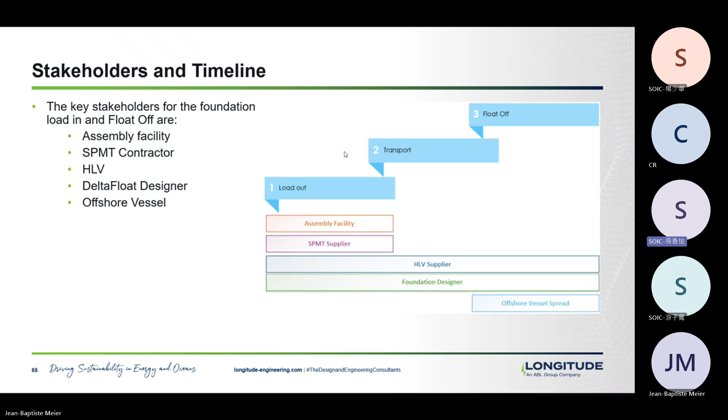Then for float off only, we will need an offshore vessel spread, can be AHTs - basically some vessels to perform station keeping of the foundation and help with the float off from the HLV.

And lastly, a marine warranty surveyor might be required depending on your stakeholders' requirements, but basically they would work across the different phases from loadout to float off.

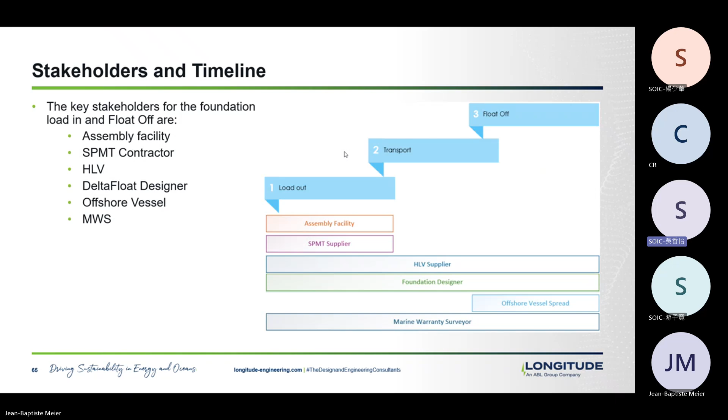Design brief and design basis, same - there is a good understanding, and we will have to basically ensure the loops between engineering and design with the operation procedure.

We are closer to what we had for the mooring, which is that today there is sufficient expertise from different operators to provide procedure feedback and feedback from operations. So the engineering can start with existing data or reference points for designing and getting the design suitable for operation, but this time will still be the critical time and the critical loops to be able to coordinate the work and progress in the planning.

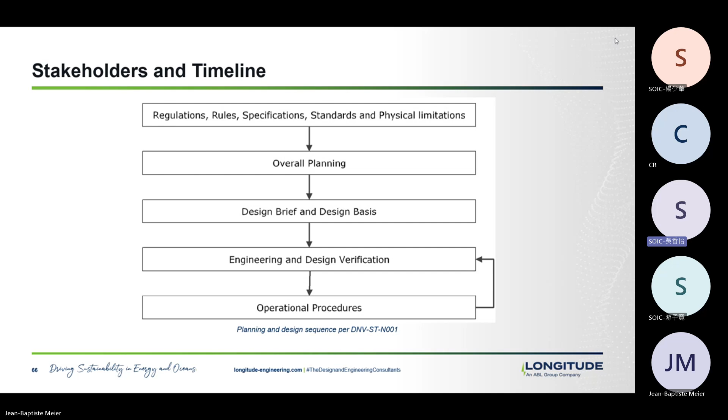In terms of global timeline, same as for floating to floating, we are talking about a range of durations that are in the year or years before.

These are operations that need proper planning, proper selection of assets, and for which the operation engineering is going to be critical. The operation engineering will depend on your foundation and on your engineering, so it has to be incorporated in the design of your asset as early as possible. We will see there are impacts when you perform loadouts and floatouts that can be directly within your primary steel, so as early as possible you will need to understand the interfaces you will face during loadouts and transport.

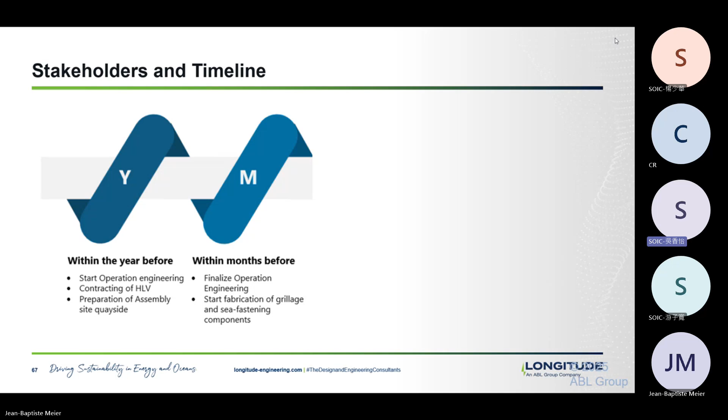In the months preceding the operation, same - you will need to have finalized your operation engineering. There are significant amounts of steel to be fabricated to enable the operations. You will need support, grillage, sea-fastening, guides, specific reinforcements on the HLV. All this will have to be engineered, and you will need a range of months to start fabrication. The biggest component in terms of weight is usually the grillage and sea-fastening components, which obviously depends on your foundation and HLV selection.

Within the weeks before, you need to have obtained approvals from stakeholders like the MWS. You will mobilize the HLV to the assembly site and start installing any temporary steel on it, usually starting with the grillage. It can be a significant amount of work that you will have to do at the site.

And then within the days before, you can start preparing your SPMTs for the operation, mobilize them, assemble them at the assembly site, and test the SPMT configuration. And then you're ready to start.

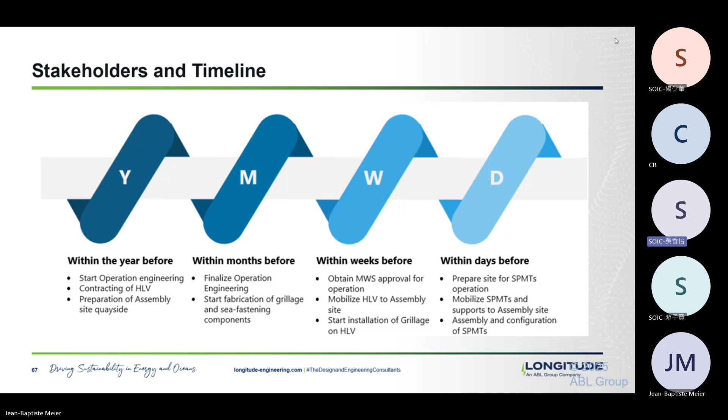When looking at asset selections, the first asset that needs to be looked at is your HLV, or your semi-submersible vessel or barge. The difference between vessel or barge is because the vessel will have its own propulsion, the barge will need to be towed with its own towing spread.

The few criteria that you will need to meet, one will be the loading capacity of the vessel. So you will see the vessels that are rated in terms of their ability to load cargo. In terms of cargo density, your foundation is actually quite low compared to, say, oil and gas modules, for example, that have fewer interface points and concentrate a lot more of the loads.

But still, one of the main limitations and one of the drivers that you will have for your selection of the asset, it's going to be the deck size and related deck strength.

The deck size, when you're performing transportation that's going to be very short, if it's just about bringing the foundation offshore to do a float off, because you basically use it as an alternative to lifting to launch your foundation, then you can take very narrow weather conditions, and you can afford to have your foundation being wider than the vessel, or having some temporary steel to support the broad footprint of your foundation. Because that's the main issue that we have with semi-sub foundations, it's just their size and their footprint.

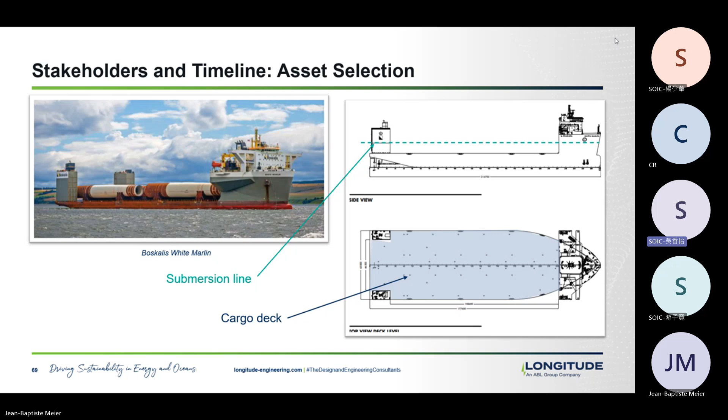The next thing we look at is the submersion line - the ability of the vessel to go underwater. On this one, the White Marlin line is indicated here. Basically, your vessel will offer you all this clearance to satisfy your foundation draft plus the grillage plus the clearance. These are the main two parameters that we look at.

When mentioning the availability of assets, here you have a very broad picture of HLVs. You can see that the capacity goes up, nearly multiplied by 5, if you take the biggest one, the Boka Vanguard, which is overkill for your foundation, let's be clear. Down to smaller vessels from the SAL family, for example, this is the total lifting capacity. Even with the smallest HLV assets in this table, the margin that you have with your foundation is quite broad.

You could even consider, in the event where you're doing an actual transportation with a voyage and not just a launching for a float-off, to have more than one single foundation on the vessel. It's only a matter of deck space available. As I said, the main constraint you will meet is how much breadth you can provide on your vessel.

Here, for example, a 60-meter breadth allows you to support the 3 columns up to the side shell, but you still have some of the foundation overhanging - roughly half of your column diameter is over the water. As we said, when it's just a float-off operation, it's not a problem because you're not sailing in unrestricted condition, going very far. It will become a problem if you try to go further and have a transportation or voyage case for the vessel, and this is the factor that's actually going to limit the most the selection of the vessel - the breadth of the transportation.

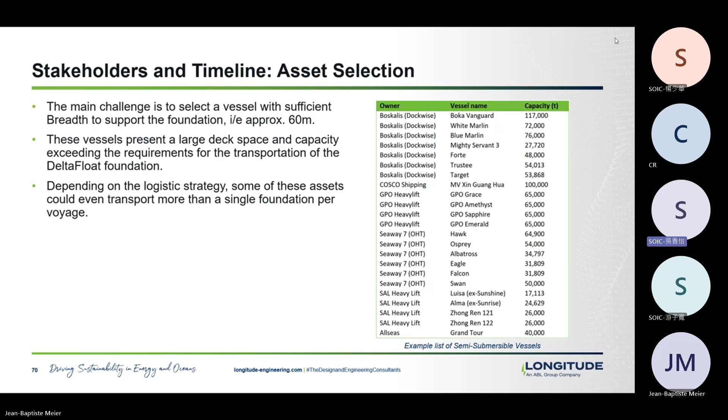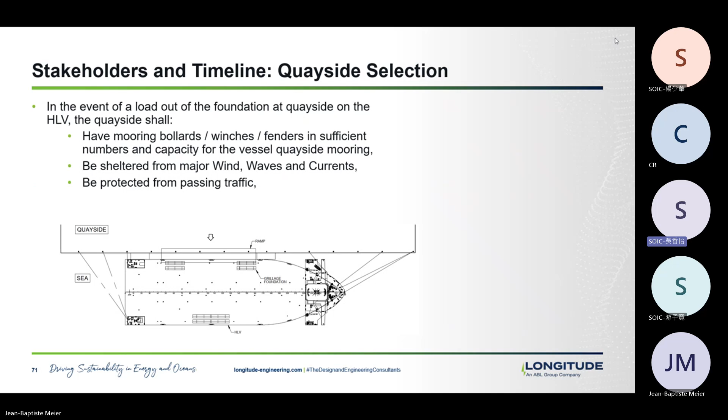On top of selecting the HLV, the selection of the quayside or marshalling location, call it as you want, will also have its set of constraints. The main one being the equipment already existing on the quayside - we're talking about the availability of fenders, for example, that can be permanent or temporary fenders on the quayside.

But also the bollard bits and their ratings, and the exposure of the quay is a factor that can be taken into consideration, especially when doing SPMT loadouts. Typically, if you have a lot of passing traffic alongside the quay, or if you are very exposed to wind, wave, or currents at this location, it will have an impact on your operability, and you will have to hold for longer periods of time.

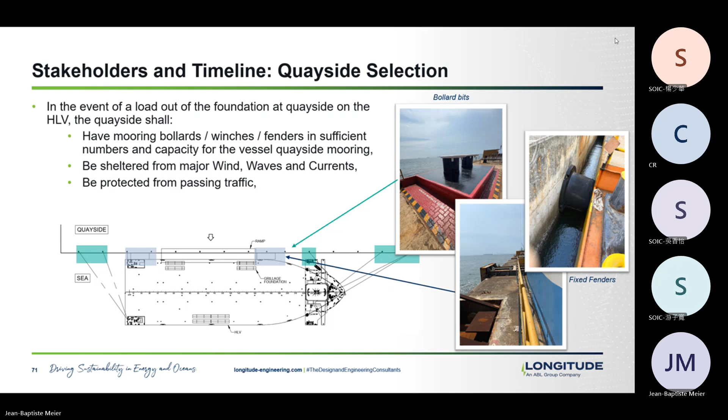Still in the quayside selection, one factor is that we need to make sure, because of the footprint of this foundation, that there is sufficient space and access to the quayside to do the actual loadouts. A lot of quaysides are able to give access to vessels when they are moored alongside, but they don't necessarily have clearance that allows the full structure to pass on SPMT. So sometimes it will require some changes in the way you have your wharf.

It means having nearly 80 to 90 meter clear quayside to perform the operation. Another factor is that while at your fabrication location, you have a grillage supporting the foundation during fabrication or assembly, you need to consider that your SPMTs, once they take the load, will transfer it to the quayside. For the whole route from the fabrication location to the vessel, you need to satisfy the minimum ground bearing capacity, knowing that if you load at near full capacity modern SPMTs, you are imposing 10 to 14 tons per square meter.

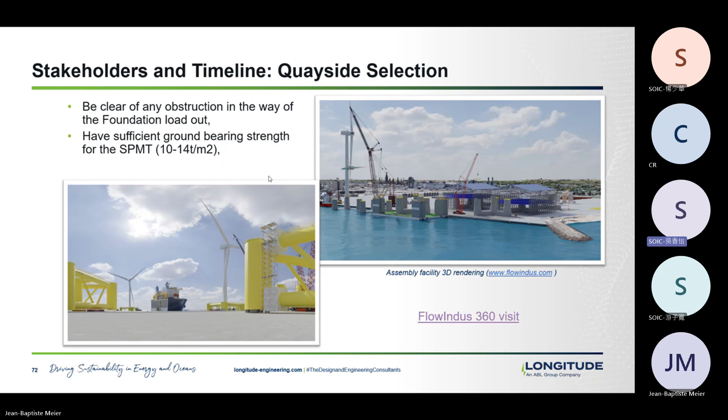So on top of that, that was for the last large asset selection, basically where you have to choose your execution marshalling location.

Now, in terms of operation preparation, we've seen there are many stakeholders. Here, one of the critical stakeholders is again going to be the designer of the foundation. It is looking back on the topics we had very early on in the introduction on your floater - it's about the weight and the control of the weight. Here, the control of the weight for the foundation is going to be critical for the SPMT operation, and also for the stability of the HLV. So you need to know your weight, and you need to know your center of gravity.

When you look at commercial models, you're not going to do weighings and inclining experiments for every foundation. But in a demo case, typically you would expect to have a weighing done - that's an arrangement of a weighing cell, for example, below a module. You would expect a weighing and an inclining experiment to be done on the foundation, except that in your case you won't be able to conduct this inclining experiment, because you will be loading out directly. So you will do indirect measurements with the weighing.

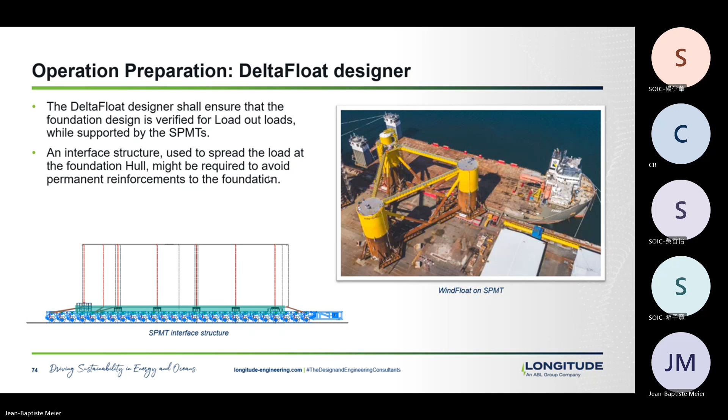Then what we need to check on the design side is going to be the motions and reaction force of your foundation when you're doing the transportation. So the transportation, even if it is a short one, you will be subject to the vessel motions, and you will have a new supporting condition. Your foundation started to be built in a static case.

Supported by the assembly facility supports, then you have an interface structure with the SPMTs, and the SPMTs will pick up the load where the construction supports are not, because you cannot insert your SPMTs if there is a clash. And then you also need to make sure that the interface with the barge, between the barge and the foundation - which we will see after, is the grillage - also will require your foundation to be verified.

So it is in 3 different steps. You will have 3 different locations where your foundation can have a local strength impact, so you need to check all these cases. In this case, they have different ranges of loads, and they also have different configurations in terms of distribution under your vessel.

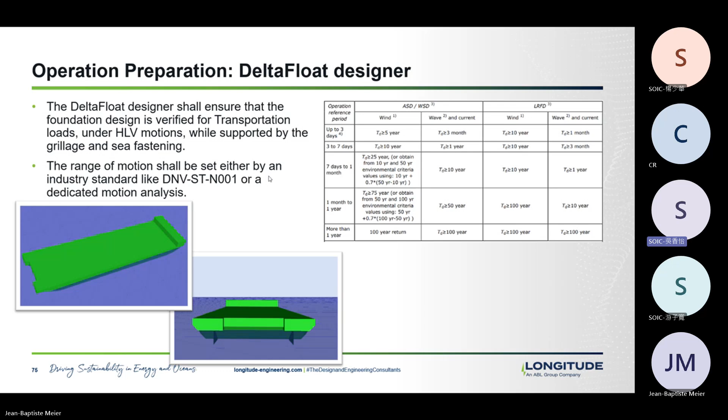You need to basically make the connection between your cargo that's going to be on top and bring your loads down to the main structure of the vessel. So you will target the bulkheads, the main frames, the column locations in your vessel structure.

The idea, as I said before, is that you prefer to add a grillage interface that is welded to the deck rather than reinforcing your vessel under deck or reinforcing your foundation. So you try to distribute and have a proper load path from your foundation down to the vessel structure.

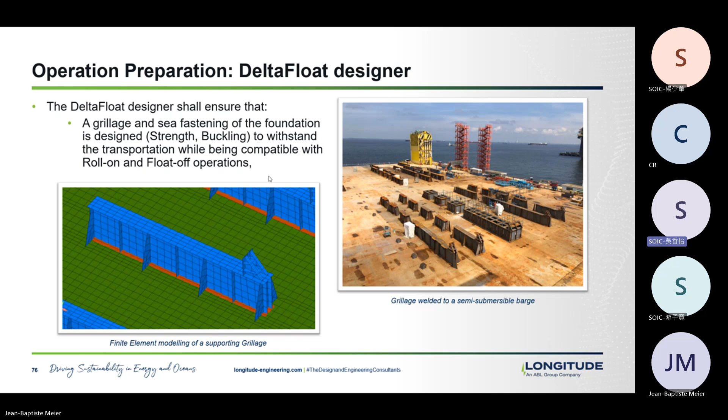In this case, for example, where we needed large brackets that were encroaching on the space, basically the brackets were installed after the SPMTs traveled through.

The next thing to check on and prepare for on the design side is the point we made already on ballast on the previous one. So all your conditions of ballast, draft, stability considerations, they have to be done for every step of the float-off operation. That means having a good understanding of how you are going to launch your foundation.

Are you going to launch your foundation with some ballast already in the foundation, maybe partial? But then it means that the loads you will subject either the SPMTs or at least the grillage to are going to be greater, because you're carrying ballast water in your foundation and transferring this load into the vessel. So then the load is not just your weight, it's not just the 4,000 ton you were talking about, it's the 4,000 ton plus whatever ballast you're putting inside.

The other option is you're transporting the foundation without any ballast. But then you have an excess of buoyancy - I haven't seen your calculations on this, but basically the free floating condition of your foundation without any ballast gives you a very, very shallow draft, because you have all your pontoon volumes plus the column volumes that bring buoyancy, and you're only supporting 4,000 ton when you have a displacement target that can go up to 20,000 ton plus. So it's going to be a very shallow draft, and that means the behavior of your floater is going to be quite different.

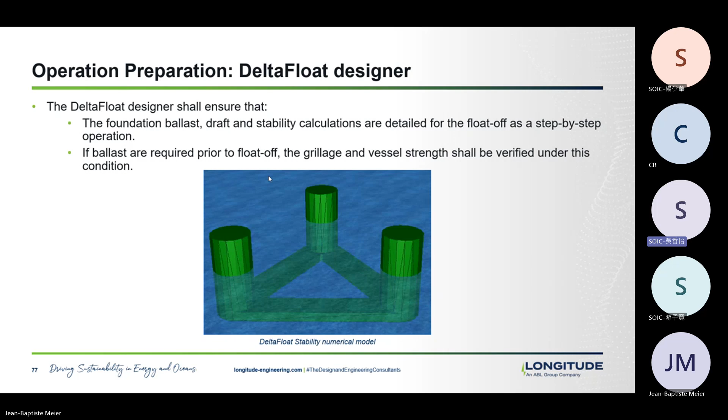We still continue—there's a lot of preparation for the foundation designer. Next point: we cannot neglect the fact that you will have a lot of towing activity, station keeping, and maybe some mooring activities if you have some temporary stage where you're moored.

All this basically will need outfittings on your structure—secondary steel, like for example pushing bars. Here, like the top part, there are bars to push the structure. All this secondary steel needs to be taken into consideration in your design, not only because it will impact your weight, but also because it's going to drive the operability and how you're going to control the position, what kind of asset you can use, what kind of towing rigging or station keeping rigging you can use. So all this needs to be set and discussed with the offshore contractor.

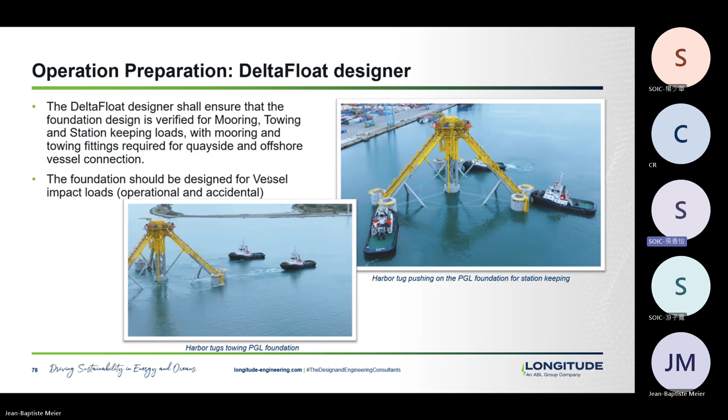And then you always have the possibility in some cases of direct push on the structure from the tugs. In this event, it means that you need to have a push area that has been calculated and designed for the foundation. But even if you don't intend for intentional push and having a push area, you will still need to subject your foundation to impact loads and verification of vessel impact loads, especially around the boat landings. So you will have requirements for either operational push or accidental push and impact study to do. Again, that will impact your primary steel and the design of the foundation.

Last smaller points on preparation for the operation with the designer of the foundation: accessibility. We need not to forget that whatever your ballast condition is—which is not your operation ballast condition, because your operation ballast condition will be one where you have the turbine and your ballast at the level where you target it, so your draft will be your operational draft—but when doing installation and float off, you still need to provide access for people, while the draft might be different by a few meters from your design condition, from your operating condition.

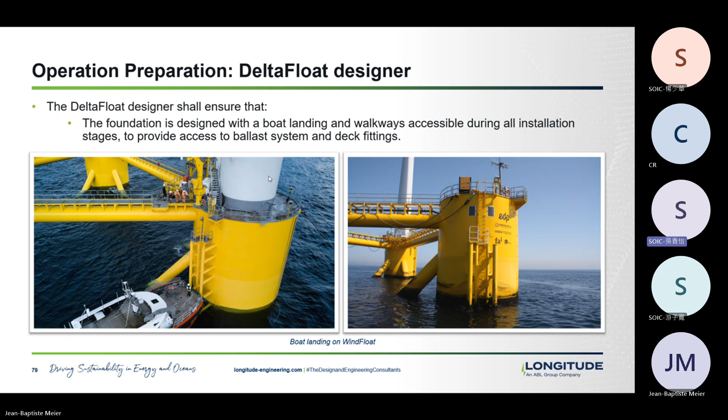Next, on the preparation of the assembly facility: usually the assembly facility will be the ones taking the coordination for the SPMT transportation down to the loadouts. Usually the transfer of responsibility between the assembly facility and the HLV contractor will be at the completion of the grillage and sea fastening of the cargo on the deck. That's usually where you will transfer the responsibility, and after, the yard is only there for support, for the quayside mooring, this kind of thing.

But similarly to the earlier points, when you're responsible for the operation and for the loadout, the assembly facilities will need to define the teams, the coordination, the responsibilities between the teams, and the methodologies used for the loadouts. They will need to bridge the procedures—here they have more parties to bridge, having to bridge the SPMT contractor, the vessel operator, but also the foundation designer, to make sure they are all aligned and produce a comprehensive loadout procedure.

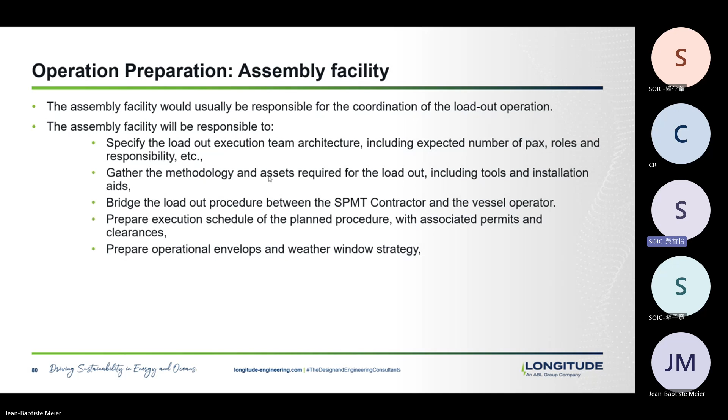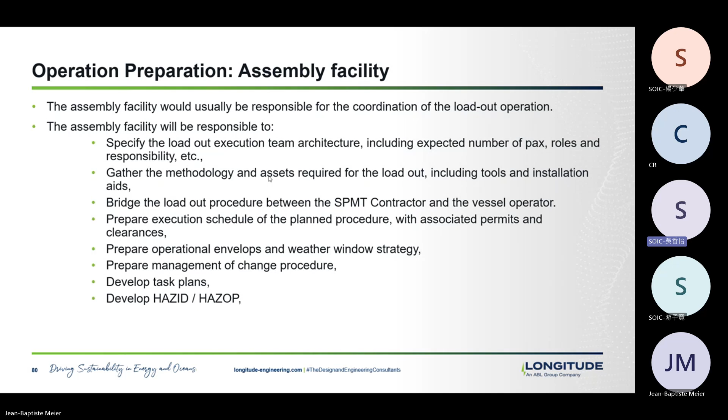They will need to align the schedules and either issue or obtain the relevant permits and clearances to operate. And last, more generic plans on the management of change, the task plans, and the HAZID / HAZOPs—so that they will cover basically down to the securing of the foundation on the floater.

In addition, it's the point I was making before - they will need to make sure that the way they have assembled the foundation is compatible with the loadout methodology. That means that the way they do assembly, which can be months if not a year before the loadout operation, needs to support an SPMT loadout before you even know your loadout plan. So it's about early engagement with, for example, SPMT contractors, where they can give you the target SPMT module size and how they would ideally arrange it to transport the foundation.

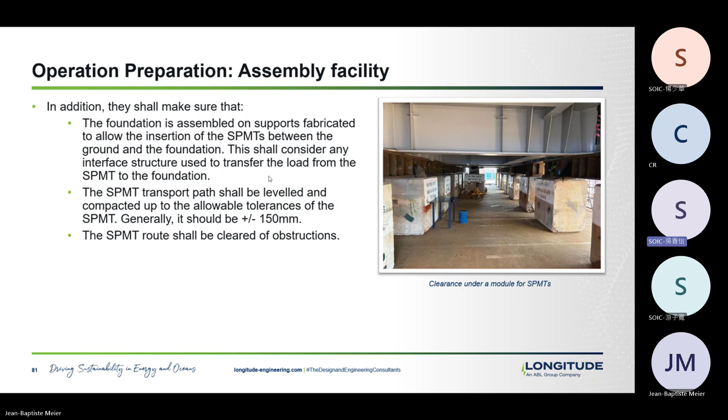The assembly facility shall also make sure that the ground level is fairly consistent across the routes. SPMTs can take some elevation variations and adapt to it, but they give as a target to have a route that stays within plus or minus 150 millimeter elevation difference. And the route needs to be cleared from obstructions and other projects.

Another point the assembly facility needs to check - we talked earlier about verification of the general ground bearing capacity. One area that can be neglected and can be critical for a loadout is the actual wharf capacity, basically your quayside capacity, especially because you will hold a concentrated linear load that comes from the ramp connection to the quayside.

That means you will concentrate - if you're in this configuration, you will have already some load on the barge, but out of all the axles, 40 tons per axle that are on the ramp, half of it is being supported on this single location on the ramp. That means the distance for the ramp from the tip of the quayside and the capacity at this location needs to be very well understood.

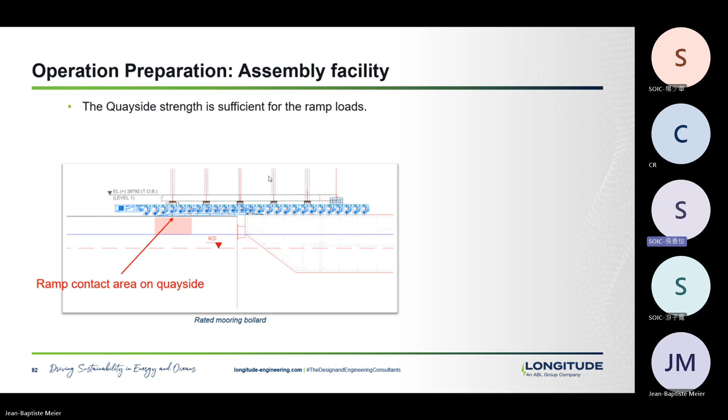Facilities used to doing skiddings and SPMT loadouts will know and will have a wharf, usually one special location designed to accommodate this, because they need additional anchorings of the retaining walls to maintain and hold this capacity. Marshalling facilities not originally designed for loadouts might face issues here, so they can make do with extra spreader bars or getting the load to go further. Mammoet, for example, provides matting supports and structures used to offset the load and create a bearing load on a much broader area - but that comes at a cost and a complication.

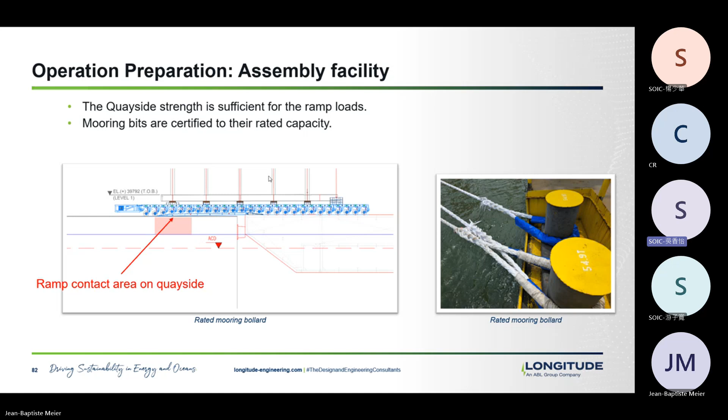Then for the assembly facility, we talked about the mooring bits. The one thing that is necessary is that these mooring bits need to be rated and load tested. So all this needs to be prepared, and obviously the rating of this bollard needs to be in line with the mooring analysis you will do after.

Then some more generic points - they need to provide proper access, so a gangway for example to go to the semi-sub barge. They need to provide all the services to conduct the work, and they need to provide protections and all the clearances for the operation.

Then looking at the SPMT - it's a modularized transporter, basically based on a unit of 4, 6, or 8 axles, I'll show you on the slide after. You can combine these units as groups or trains to carry as much load as you need, and these units are connected hydraulically, which helps spread the load down to the ground. So you take the load from your cargo and have an equal distribution of pressure from your wheels to the ground.

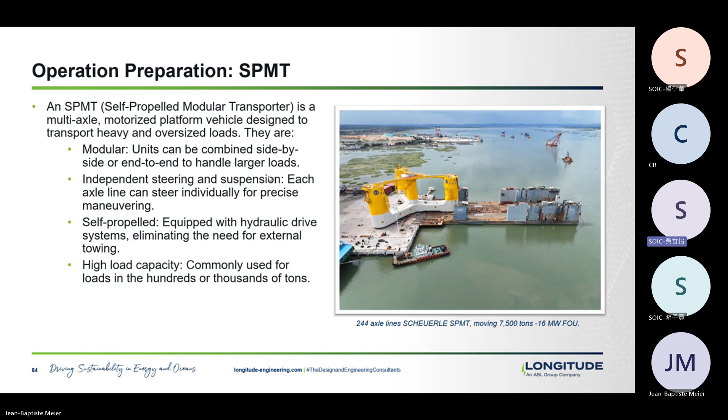These SPMTs can maneuver very well, they can turn on themselves - I'm sure you've seen some pictures. They allow for a very accurate operation and good maneuvering, for example to go and position the cargo on top of the grillage with good accuracy. And obviously it is scalable, so that gives you quite good range in terms of loading and total lifting capacity. The lifting capacities for each train, each step - so if you have a 4-line, 5 or 6 line, it will vary.

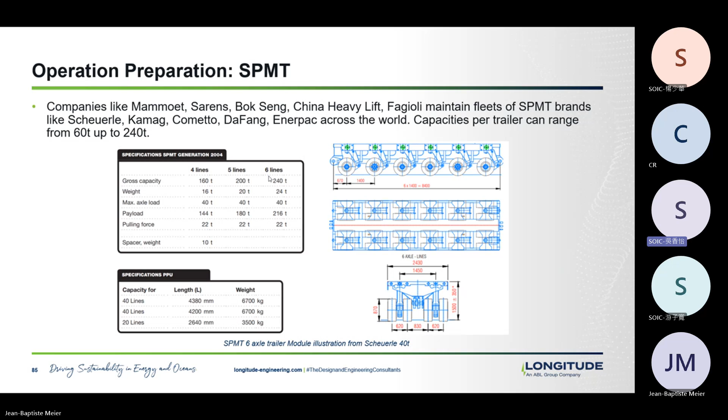There are a lot of brands and a lot of people operating these SPMTs. The famous brands are like Mammoet, Sarens, Bok Seng, China Heavy Lift, Fagioli. They all have a range of SPMTs, but don't necessarily have their own brands of it, the famous ones like the Kamag and Scheuerle ones. The fleet of these SPMTs is quite broad, and they can be brought from either civil work locations where they would use the same thing, or from oil and gas locations, so it is a resource that's easy to supply.

So in the case of the floater, for example, if we were to use an axle distribution and having a 3-point triangular stability support, we would use 48 axles in this case. So you have double trains basically mounted side by side. How you're going to get the sizing and selection of the number of SPMTs depends on the footprint and how much you want to distribute the load from the foundation. But it's also based on the input in terms of your total cargo weight and contingencies with the interface structure weight, so anything you need to add to your foundation or your SPMTs to take the load, the sea fastening. It's not the same scale of sea fastening as what you have at sea, but ultimately, when doing your SPMT transportation, the SPMT and the cargo are lashed together.

So they use turnbuckles, they use lashings, they will weld some pallets, but basically they need to be able to take the loads, especially coming from acceleration and braking. It's usually more braking than acceleration that can happen during the transportation.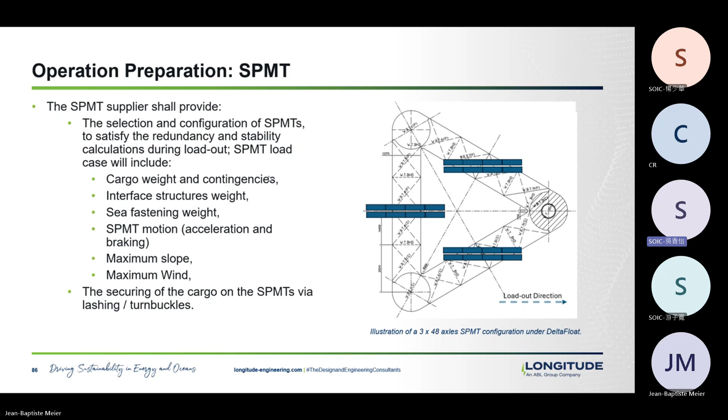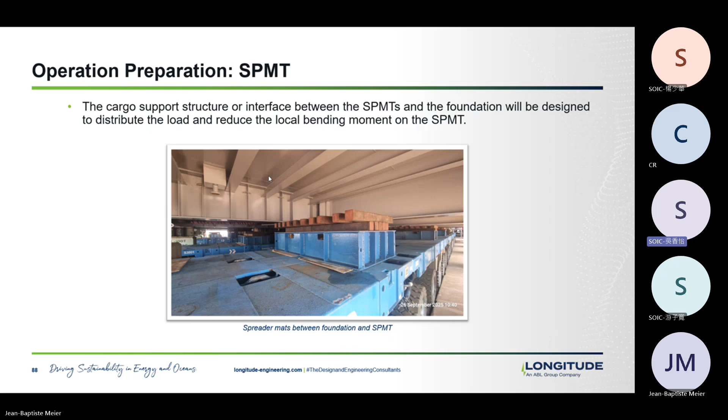The next point on the SPMT side for preparation is the ramp. We're not talking about the ground part, but the ramp itself. The ramps are usually welded on the barge side, so you'll have a slope that's welded and a hinge connection so the ramp can move together with the heave of the vessel and the tide.

The ramp is only deployed when doing the actual loadout operation, because when you're waiting and preparing, you don't want the ramp in position. You want to be able to go for low tide without having the ramp in the way. So it's usually parked to allow the vessel to go up and down, and only when the operation is in a readiness state do you install the ramp and start the ballasting control of the HLV, which we'll see after.

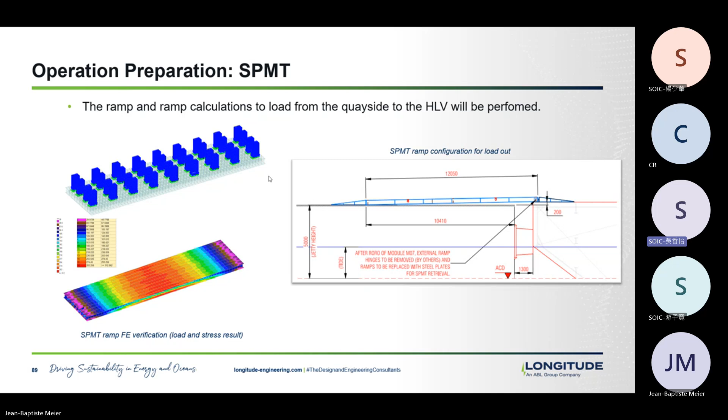So these ramps exist in catalogs - you can rent them, and basically the SPMT providers will usually come with their own ramps along with the SPMT.

The last point of preparation for the SPMT is gaining understanding of how the cargo is going to be moved from its fabrication or assembly location down to the position where it will be inserted onto the transportation vessel.

Here it's fairly straightforward - basically just a move forward to get away from the construction supports, then a kind of crab translation, diagonal translation, to face the ramp and go on board.

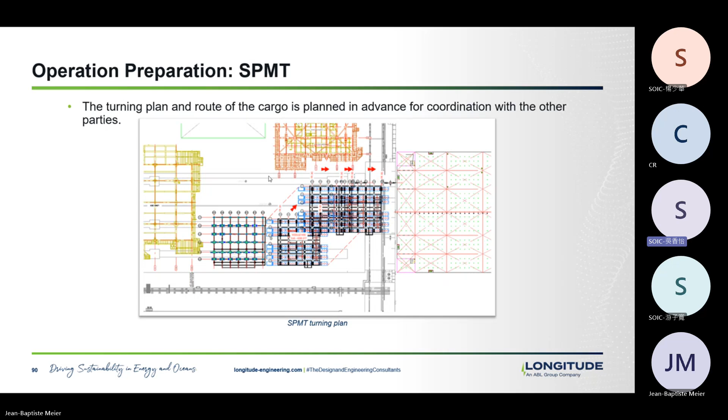But you also need to consider the environment around - there was another construction project just beside. So you have limitations, and knowledge of the site is important to plan the operation and get the turning plan right.

That's for the SPMT.

So, HLV. As we said earlier, the transfer of responsibility would usually be done at the completion of the loadout of the foundation onto the grillage once the sea fastening is complete. The shipyard will perform the sea fastening activity once the NDTs are finished on the sea fastening, then the handover is done to the HLV.

The main responsibility - I'll go quickly through this, but it's always the same thing - once you get responsibility for the operation, you're responsible for setting up the team, clarifying roles and responsibilities, making sure the methodologies and assets are in line with the intended operation, and that there's a good understanding of the schedule that is being shared.

Managing your operational envelope and the weather window strategy, and the general plans for HAZID, HAZOP, task plans, and management of change. Again, all this, even if it sounds repetitive, will have to be produced.

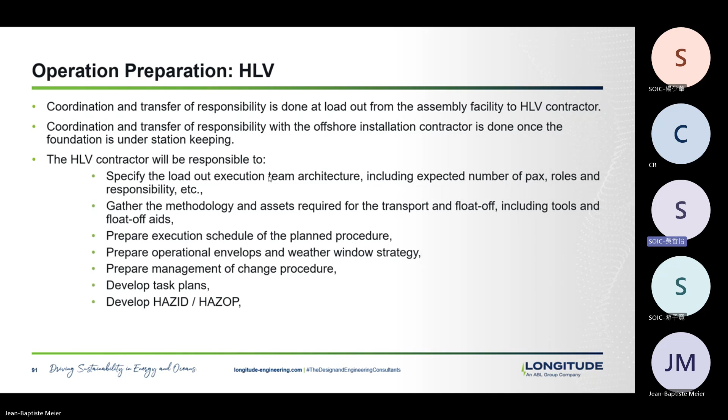Basically there should be no gray area in terms of responsibility. And that's where it's complicated, because when you lack the experience, you try to rely more on subcontractors and on people who have done it. But that's why you get some gray areas that are not being flagged out.

So the first activity and the first check for the HLV is on the mooring side. As we said, it's back to the table of operation reference period. How long you intend to stay restricted to the quayside is what's going to drive the selection of your environment return period. As we said, you can base it on the DNV-ST-N001.

Yeah, you can do site-specific calculations, but ultimately, even if you do seasonal or monthly calculations to cover your operation window, the return period, even if it's on a monthly basis, will still need to be 10 years or 1 year in this event.

In all likelihood, your period of time restricted at the quayside will be either 3 to 7 days or up to 3 days. For a pretty straightforward operation, you consider your mooring restricted as soon as you start your loadout operation. Before that, you can have a safe mooring - you don't have cargo on top of your HLV, which means the mooring loads the HLV sees are much lower.

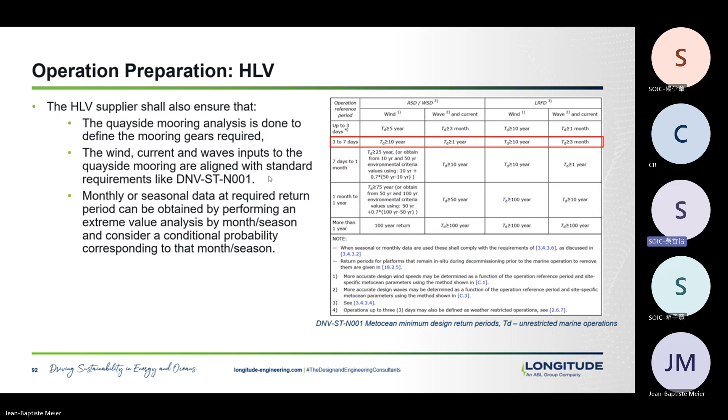So mooring analysis - for example, this is a mooring analysis run for the loadout I was showing on the previous slides of the module, on a stern loading on a semi-submersible barge. That's the one I was showing you this morning, the weather forecast.

Basically, this direction is highly subjected to squalls and high wind values. It's very exposed - it's on the west end of Singapore. And we had no choice because of the quayside and the fact there was another project here, we had no choice but to do a loading by the stern of the module.

But this configuration is very demanding for your mooring lines, for your bollards on the quayside, and for your connections on the barge side. So you need to consider your intact condition with all the wind, wave, and current effects that apply on the vessel and the cargo.

That will be subject, obviously, to the variations of draft that you can have. And one of the biggest contributors to the variation of your mooring lines, at least the pretension in it, is going to be the tide effect. The variation of tides, when you're not doing the actual loadout, when you're just moored to the quayside, the tide is going to cause your tension to vary on the mooring line.

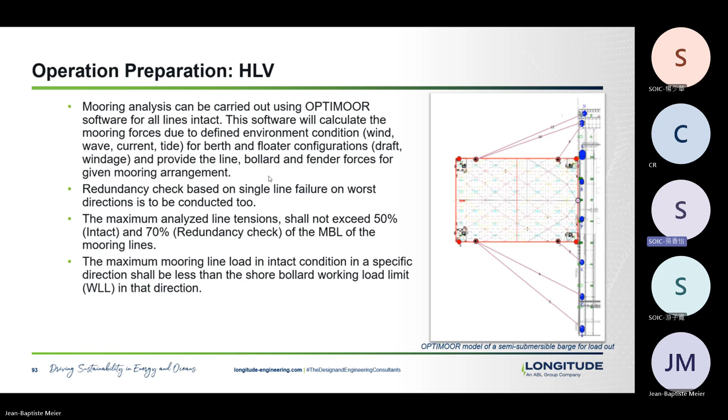Then after mooring, obviously one of the main topics on the HLV is going to be stability. And there again, the stability is not just a one-off load case like what you have for transport. So transport is one configuration. The loadout is going to be, and you will see after, a step-by-step loadout approach. So your stability, your longitudinal strength will have to be checked for all these steps.

Same goes for the float-off operation. As we said, the float-off operation will see different ballast configuration on the HLV, but maybe also different ballast conditions on the foundation itself. So it is a large number of stability configurations, and 10 configurations is actually going to be run to check a loadout, transport, and float-off operation.

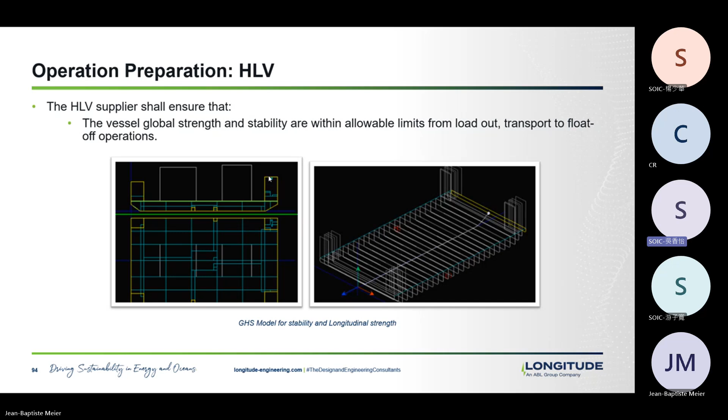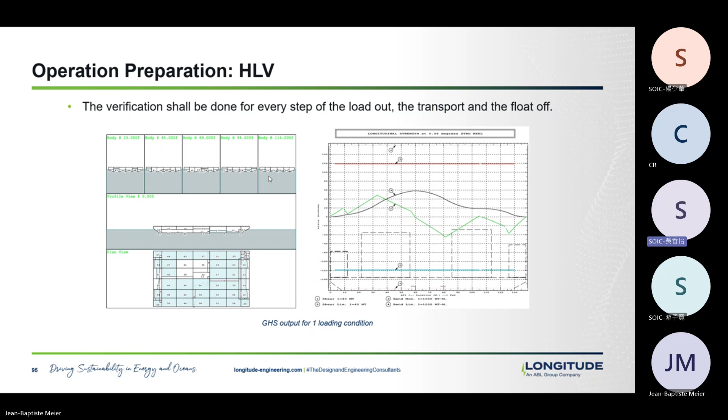So yeah, that's what I mentioned here. That's just an example, for example, of one, using GHS as the stability software. So it's one tank configuration, which is an awkward one because these tanks were being repaired. But that was one step to meet the loadout condition for the modules. And I try to keep the same examples through the presentation, so it's still the semi-sub vessel and the module I was showing you before. So obviously what you are targeting at is to get below your permissible shear and permissible bending moment.

And meet your stability criteria, obviously. But it's not only your global stability and the global longitudinal strength that you need to look at. As we started to mention about the grillage and the impact it can have on the foundation, obviously the grillage has an impact on the vessel. We want to make sure this grillage doesn't impact the reinforcement below your vessel, but you can wish for it, you will need to verify it also.

That means you don't always have to necessarily model the full vessel structure. You can focus on some local area. But basically, you will need to get an understanding on how your underdeck is working and how you're utilizing your vessel, having in mind that for your grillage you're free to put the thickness and material grade you want. Your foundation usually will have high strength steel, with a range of thicknesses on the higher side.

These barges, I mean, they are vessels, they are thin plated, and they can be very sensitive to loading from the grillage. It's not only the loading of the sea fastening and the grillage, which transfers your load from the foundation to the glue structures into the vessel. It's also the SPMT axle load.

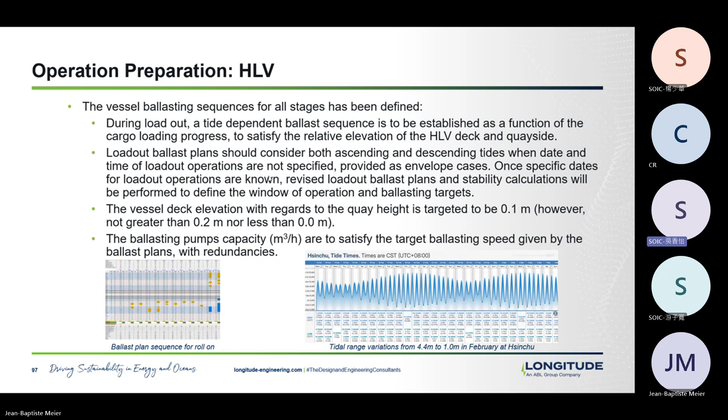All these calculations drive you to this kind of table. It's blurry, but I'll explain how it works. That's basically your step-by-step ballast plan. Horizontally in all the columns, it's step-by-step times, every 10 or 15 minutes. Because we know the dates of operation, the expected tides, the elevation of the quayside with respect to the water and all that, that's our top data.

So that's the setup of our operation: what are our different elevations, what is the time of operation. And all these are discrete steps, covering the hour and a half or the 2 hours required for the operation.

Then all these lines here, all these rows, they are all the ballast tanks available in the vessel. Some of them, like grade 1 for example, were out of service, so we couldn't use them. Some are tanks that are not being affected, like day tanks and things that are not ballast tanks. But then what you do is for every step, assess how much volume you need to transfer from what tank to what tank, or outside of the barge, or onboard. So how much variation per tank do you need to do?

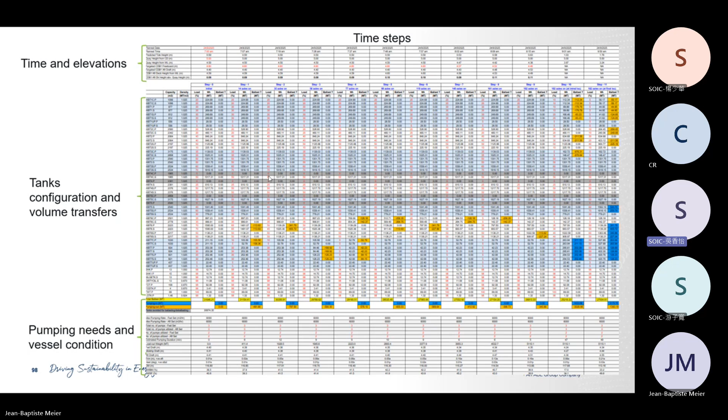So that was for the load-out. For transportation, it's actually very straightforward. It's a single case, and it's usually a case where we try to select our ballast configuration to minimize motions. In your event, you will see how much load is being transferred from the cargo to the vessel under motion. You have a short transfer, you expect to have a short transportation and weather-controlled transportation. So you might need a very limited adjustment at departure, but basically the idea is, okay, I want my transport condition once I leave the quay.

For the float off, I'm not going to present it again, but basically you need to do the same work in terms of ballast sequence. But this time your limiting criteria and your variation is not your quayside elevation, is not how much clearance you have with your ramp, it's how much clearance you are creating with your foundation, knowing that your foundation is also sinking, gaining draft up to a certain point, and as we said, will be impacted also if you're ballasting the foundation at the same time. So that's why understanding the launching condition of your foundation is going to be important to understand if you want to launch it with partial ballast or anything. But the principle remains exactly the same.

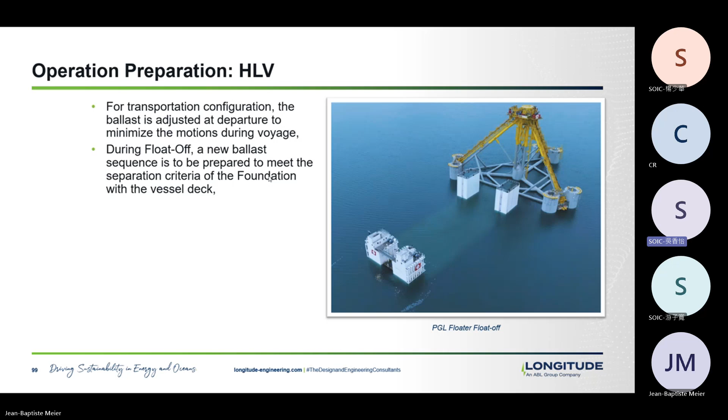During the float off, the operation basically - your target is to gain separation of your floater so that it's free floating, under control by the tugs, and sometimes you can also have some tieback lines that connect to the HLV vessel. But the idea is to understand what draft do I need to reach with my HLV to get the floater into the free floating condition, and where can I do this float off location to have sufficient clearance or sufficient water depth to do the operation.

You have two philosophies. Some HLVs are compatible with bottom approach, which is basically they can accept to have the aft bottom of the barge touch the seabed. In terms of position control, they favor this approach when they need to stay in position for longer durations. But the majority of HLVs, when running faster operations with benign environments, will remain in an even keel configuration, just maintaining even clearance between your bridge supports and the foundation.

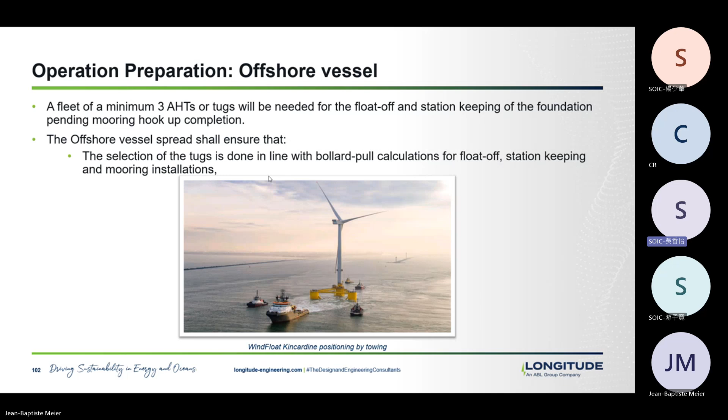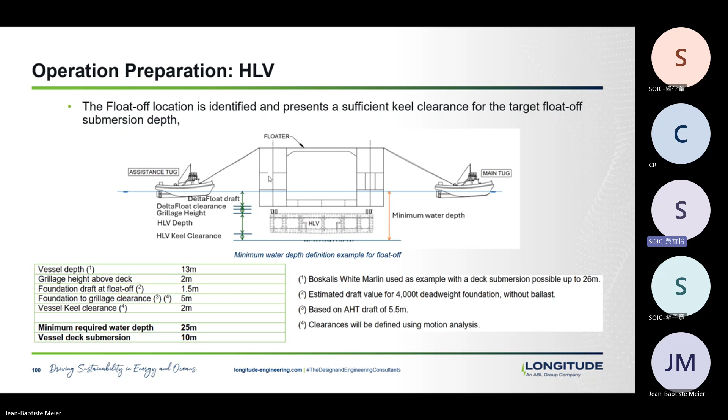Can I go back to the slides? Yeah, so here I think it's something similar to what we did just a few years ago on float over. The other is essentially opposite. The guiding post that JB was mentioning is somewhat similar to the LMUs and DSUs, where there's initial separations, there could be movement of the floater, whether you need a guiding post or a polymer to soften those loads, something you need to design and analyze in steps.

No problem. And the last one, the MWS, again same - it will depend on your stakeholders' requirements, but these activities are even more relevant in terms of marine warranty survey, especially loadouts and float off. Basically, the range of services would bring you the inspection, the document review, the coordination of operation on site, and the witnessing of all this.

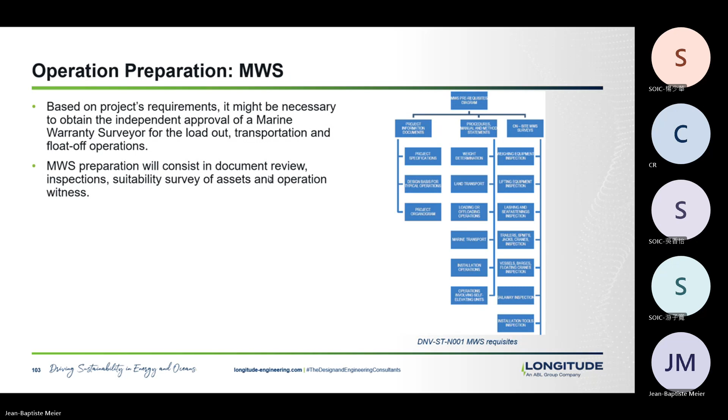Now going to the actual execution of the operation. As we said, we have the HLV that will come in position and be moored. In this event, we put it alongside with the quay.

The SPMTs can be locked hydraulically, and you can even choose to stroke and jack down your SPMTs to the minimum in case you need to wait. As long as your foundation can take the load from the interface structure under wind conditions, you can just wait for your loadout window to open with the foundation and SPMTs ready in front of the ramp. Once you have the operational range of the SPMT - for land transport, the SPMTs per their data sheets, depending on the cargo, can operate up to around 15 meters per second wind, and that's the one with the most impact on the foundation.

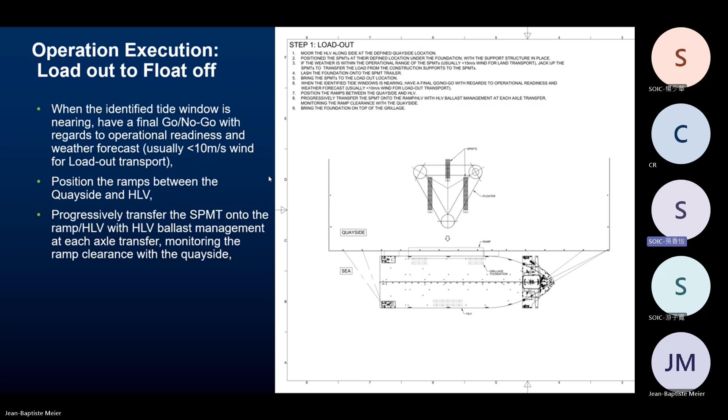Once you're ready, you will lower down the ramps, put them in position, and start your ballast management. You will start with your initial condition, then progressively and actively manage your ballast to cope with the transfer of the load and the tide variation during the operation.

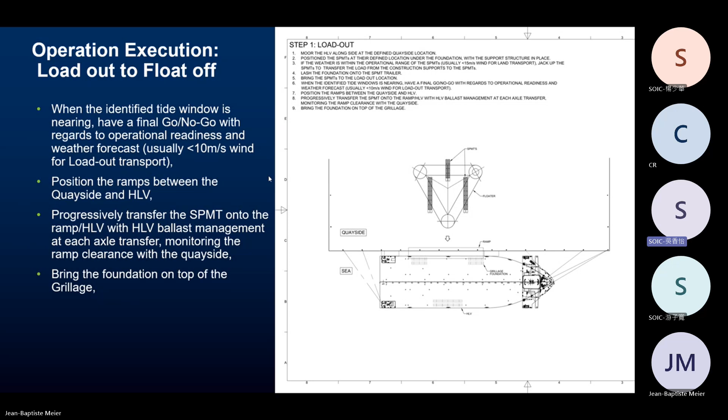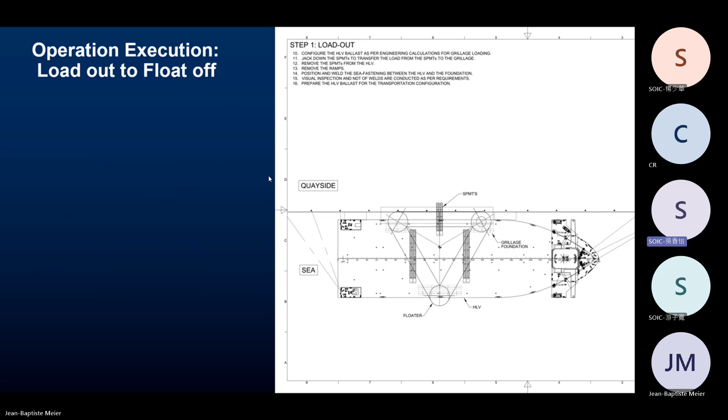Once you are with the SPMTs on the vessel, there is one extra step of ballasting you will take, which is to adjust the ballast to your grillage loading condition. The idea is that you want the ballast configuration, the shape of the vessel, to be in line with what you have prepared for the distribution of loads of your grillage.

What I mean here is that if during your loadout configuration you have done a lot of ballast, let's say deballasting at the center part of your vessel because you brought your cargo in, you are creating a situation where you have a vessel deformation that impacts the transfer of loads from the foundation to the grillage to the vessel.

Then you will need to compensate for that, meaning transferring some ballast to make the grillage distribute the load so that, at least in the static case - we're not talking about the dynamics of the vessel - the distribution of your grillage load is as even as possible through your foundation.

Once you have this ballast configuration, you can jack down and slowly transfer the load from the SPMT to the grillage, loading the grillage progressively.

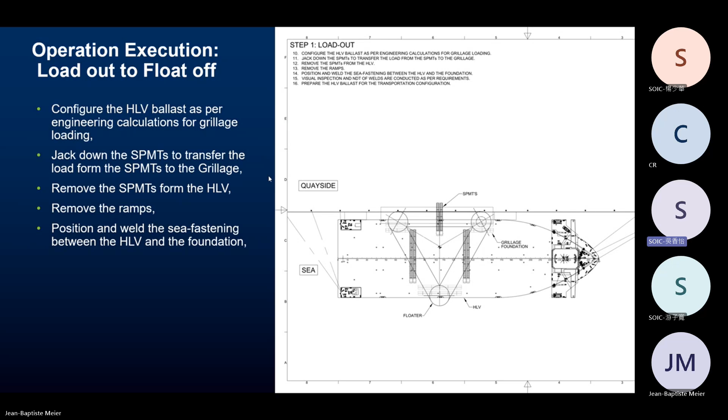Once the welding is complete for what has to be welded - usually you will weld on the vessel side or on the grillage side - you will need to wait to be able to conduct your visual inspection and NDTs of the weld, and then you are in the safe condition.

You can start preparing for the transportation condition, and at this moment you will hand over the responsibility from the assembly facility to the HLV operator or contractor. Now the HLV operator is responsible for the cargo and has to coordinate and follow the procedures for the transportation and float-off plan.

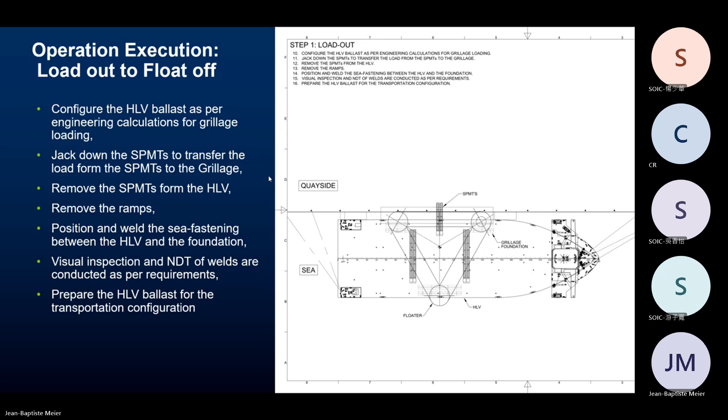The transportation is actually very short, so it's very likely that you will have a simple go/no-go decision. But what you need to keep in mind is whether your cargo and your vessel are safer being at the quayside in harbor, if you don't have the operation window to conduct the transportation and the float-off.

In some cases you might even want to include the hookup phase into your window, to make sure you are not going to have to return to port with your HLV, or tow back the foundation to port. So if you have weather restrictions for hookup that are more severe than for the float-off and transport, which is usually the case, you won't want to look at just your transportation window.

It's your hookup window that is maybe two days down the line, and that's where the operation window you will look at is actually going to be much broader than just looking at the activities one by one.

It is always manageable: if you do a transportation, you do your float-off, and ultimately the conditions are not good for your hookup, your contingency plan will probably drive you to bring the foundation back to a sheltered location. That means you have your towing spread ready, and you will bring it back to port.

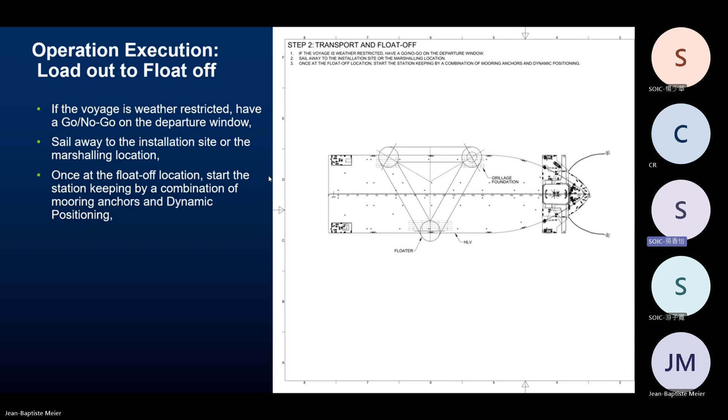So next step, when looking at the float-off, as soon as you are initiating the float-off, you need to be connected to your tugs. So at the start, they will pay out the towing line not to transfer any tension, and keep sufficient clearance between the AHT and the HLV.

But these lines, they need to be pre-installed. Either, usually it's on the foundation side and they are thrown to the vessel. It means that before the operation starts, you need to have done this transfer. Then,

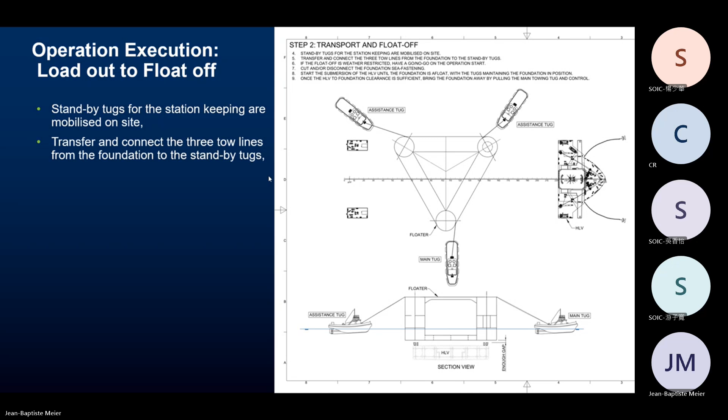In your case, uplift is very unlikely on a very short transportation like this. So you could probably have sufficient lateral guides that basically hold the foundation on the grillage, and make sure that in the extreme roll events that you can have, or the extreme motion events, you don't have any risk of uplift and any risk of a failure of your system.

So all this you can calculate, all this you can verify before doing the calculation of your sea fastening. The priority is basically to minimize the sea fastening, so that offshore you have as little work as possible to do. You want to save the time and the people that are exposed to risk, because keep in mind that if you need to cut sea fastening, you're cutting sea fastening under your floater near a side shell. Ideally you try to minimize it.

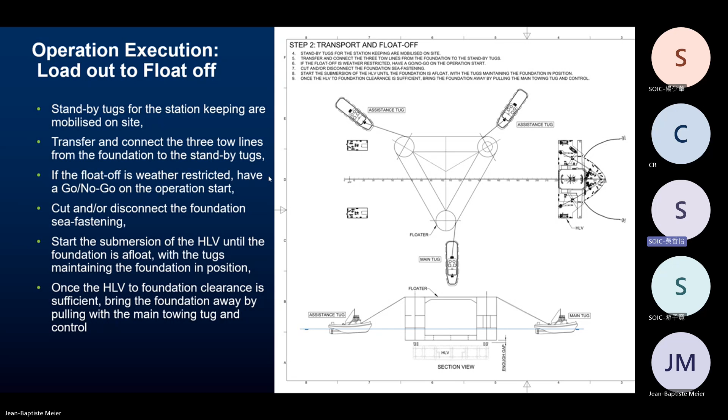The HLV basically, before coming back to the surface, you would have moved your foundation away from the HLV. You will bring it to your hookup site. It would be in close proximity, keeping the same, as I was saying, keeping the same tug arrangement to do your station keeping, or to do wet storage

in this case, I mean, as we said, if we are not going straight to a hookup phase, but you actually want to bring back the foundation onshore because you want it to be at quayside to run some operation or preparation, it is still possible. You will use the same spread and bring it to shore.

Once you are clear, this is its own separate operation. You will look at the HLV, you will resurface, bringing the HLV back to its normal draft condition by deballasting, and you can demobilize the assets for you to either clean up or recycle or reuse the grillage.

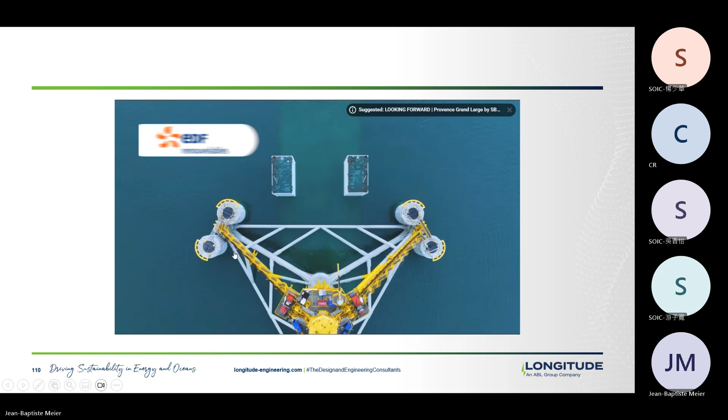And this one was just to illustrate how the actual operation should work. So that's the one. I don't know if I can put it full screen.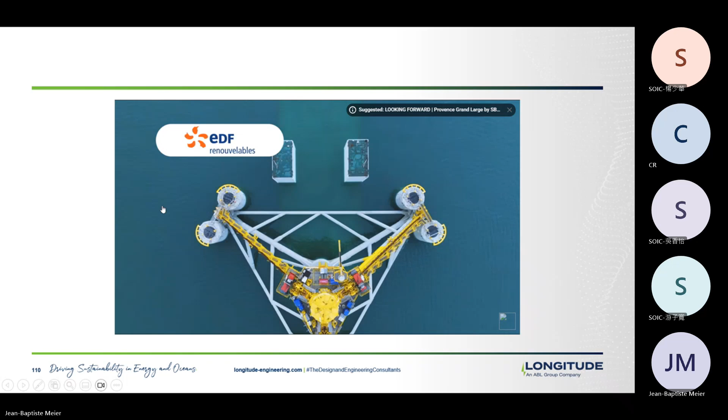So that's the PGL project I've been mentioning a few times. So that's not the one, sorry, I'll press pause there. So basically, I'll probably not play too much with it.

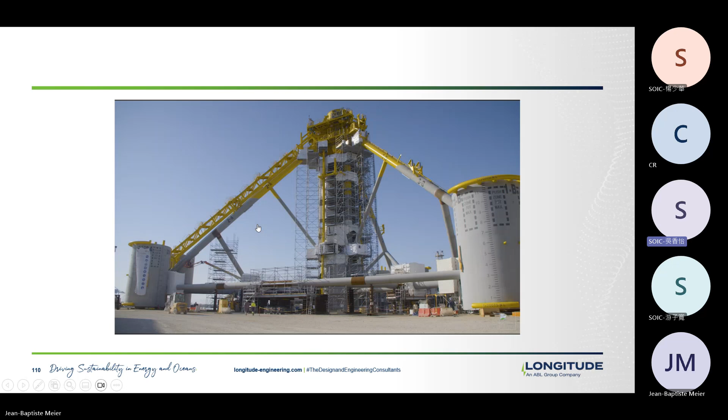So that was a loading. You will see it was a loading that was done from the stern of the vessel. Here the foundations are on the SPMTs. The grillage is actually very small, so that's the move with the SPMT. The grillage is just where it was supported by the central column, and it's a configuration that was quite similar — basically very short transportation.

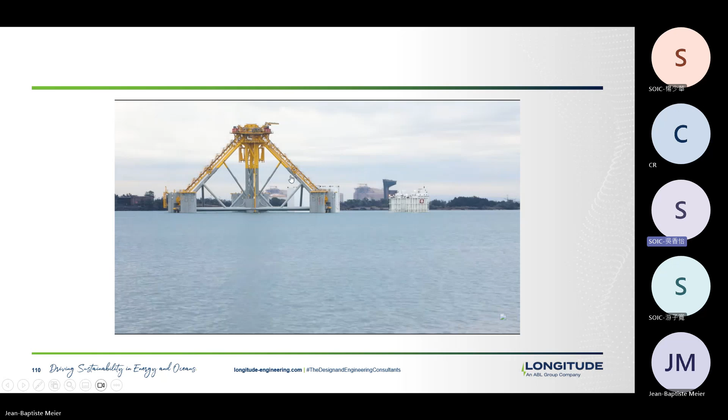So here it's a barge, it doesn't have its own propulsion system, bringing the foundation away and starting the float-off operation. You can see that they are creating a little bit of angle for the foundation, to help with the exit of the foundation from the stern of the semi-sub barge.

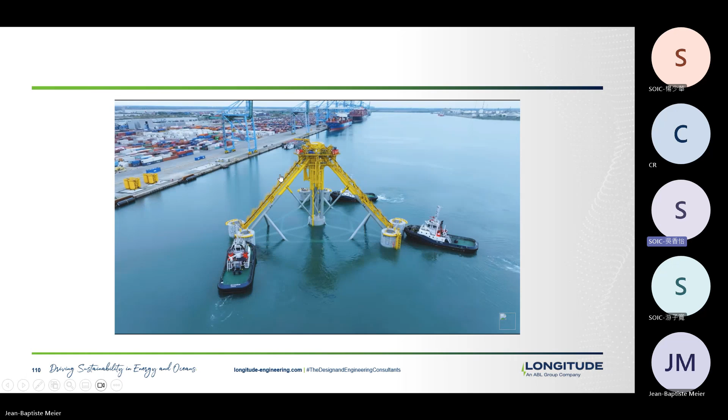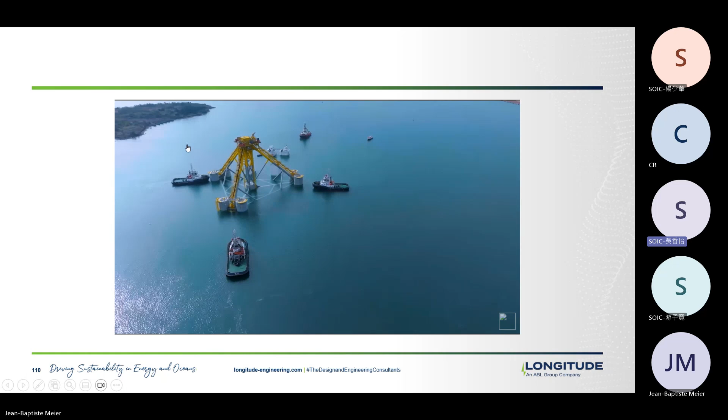So here they are slowly sinking the asset. This image is weird because you'll see it comes back to the vessel after. But basically the idea is you see that now the columns are probably around halfway submerged, so your draft is increasing until the buoyancy of the asset is sufficient to free float.

And after, I think it's just the blades, and that was the offshore installation.

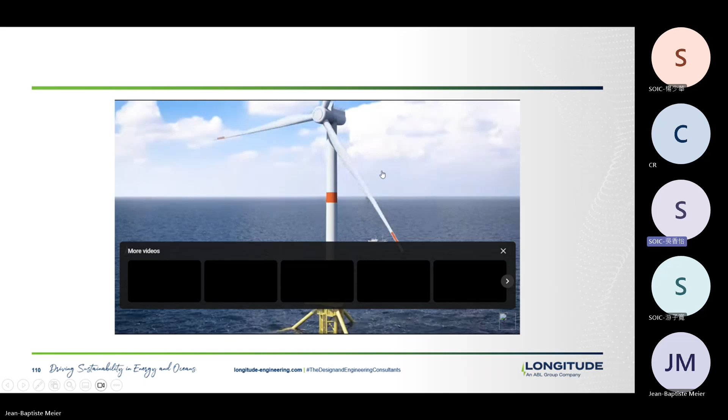So just to illustrate a bit the operation — that's why I was saying the float-off, even though it did not start with floating wind, it is something where there is already some experience, and there are specialist contractors that are knowledgeable in all that.

So yeah, now if there are some topics or discussions that you were interested in for the loadout and float-off steps, anything you would be interested to either detail a bit more or to have some information on?

In the beginning, we choose the HLV. One factor is the price of the ship. But I saw the video, the foundation is larger than the ship.

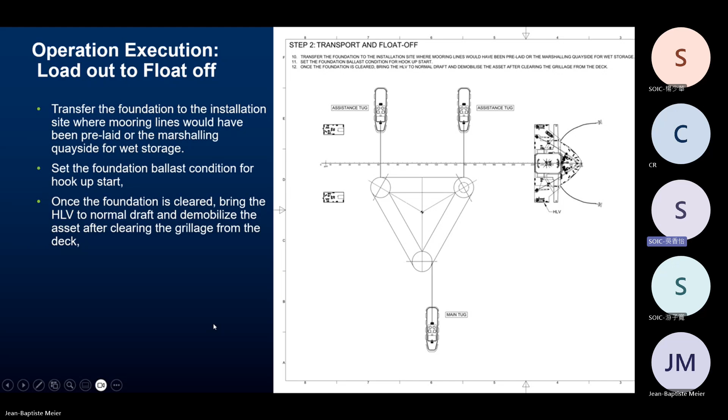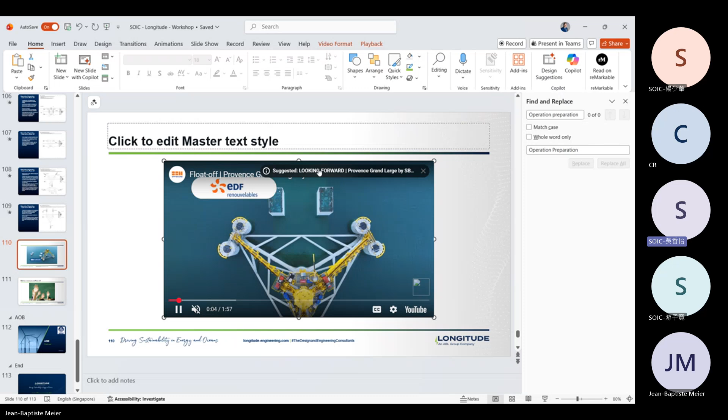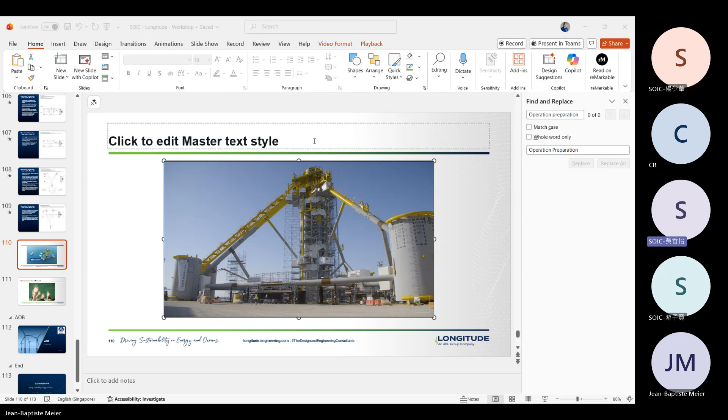So it's okay for — I mean, in this case, as we saw in the video, I'm trying to... can I open it in the player? I'll just put it back into the player so we can pause it. I'm not sure I'm sharing the right screen.

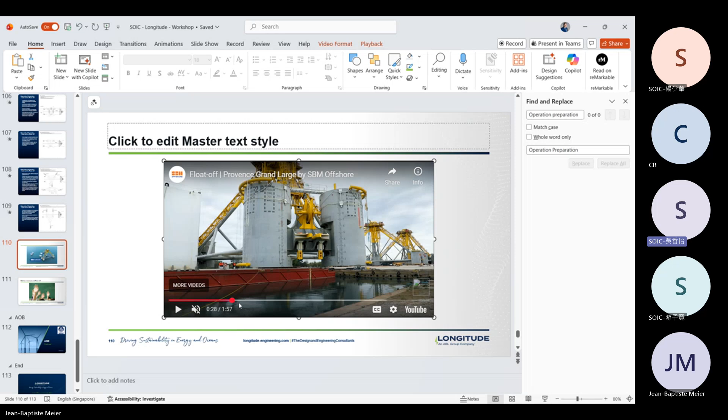So the view that we had here, for example — so this is the grillage, it's actually quite limited. In this case, because of the TLP, and in this event you have a central column, you can support from the center of the foundation. But indeed, the main issue that we had and had to work on is that when you look here at the overhang that you have, if you have a little bit of roll on the barge, very quickly you get a case of these buoyancy tanks touching the water, and basically you start to contribute — first it creates some uplift on the grillage, and then you start to contribute to the stability and the waterplane area of the barge.

And we have run some simulations where you have some catastrophic failure. Basically, when you start to have very high amplitudes, what happens is that you dip the buoyancy tanks on one side, which creates a very high restoring force that sends even greater roll motion in the opposite direction, which then sinks the opposite buoy, and brings it back. In some events, depending on the frequency of the roll motion, you could end up having a full uplift of the foundation, because this is a lot of the buoyancy of the TLP.

You have a central buoyancy tank, but the biggest contributors are these side buoys. The braces here are fairly small in diameter, so they don't contribute much. So this kind of configuration, like the one we saw before where you have an overhang of parts of your buoyancy or your columns, is okay and manageable for short transportations, or really when your objective is only to take it from a quayside to a float-off location — you just need to go outside of the port, find sufficient water depth, do your float-off there, and then bring back your foundation, for example.

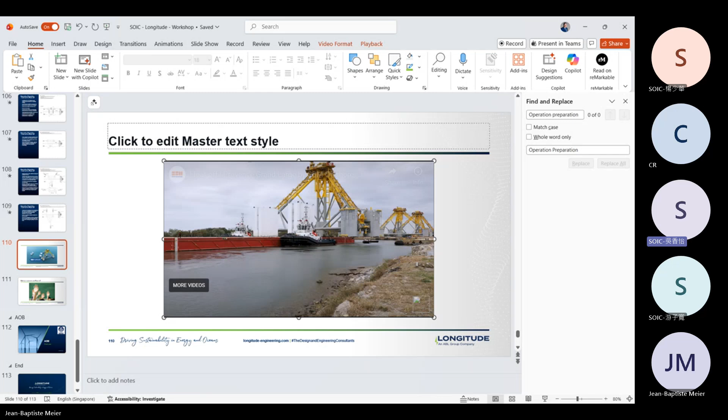You would have cases of green water to check on your foundation. So you can manage a bit of overhang, like the case we gave for your foundation. I think you could go through with that. With this kind of overhang, you could do a long transportation even with half of your column overhanging. You wouldn't do a lot more, basically.

But after, it's about demonstrating to the other stakeholders that the risks are okay, that it is safe. It's just that you might have to over-design your grillage and your sea-fastening, but then you're in a very different logic. You're trying to do a voyage that can be a few days or a few weeks, so the effort you're able to put into the sea fastening is going to be a lot greater.

You might accept having to actually weld the sea fastening to the foundation itself, because small stoppers and these kinds of things only work when you do short transportation for the float-off. If you do a voyage for mobilization a few weeks away, it's unlikely that you will do without welding the foundation. So you will weld the foundation to the grillage and/or to the barge.

And that's what restricts a lot the selection of this vessel - it's the available breadth of the vessel, not the deck capacity. And here, in terms of strength, you will benefit from the side shell, which is fairly stiff, and you can try to align with a bulkhead, for example, a concrete bulkhead.